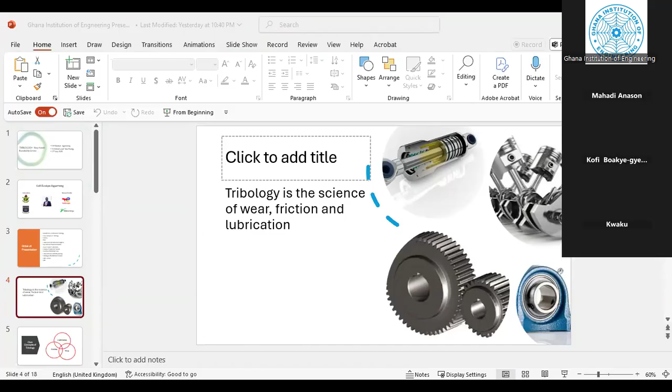Okay, so tribology is the science of studying interacting surfaces, and as simple as it sounds, it focuses on wear, it touches on friction and lubrication. As we all know, the kinds of machines that we use in our plants and in our factories all run on heavy duty equipment, and these equipment may span from compressors, gears, transmissions, turbines. I can go on and on. And all these equipment, some way, somehow, work with the principle of motion. And wherever there is motion, you cannot discount the effect of wear.

You cannot discount the effect of friction, and you cannot discount also the effect of lubrication. So tribology cuts across all industries: mining, power, manufacturing, Agric, OEMs. I mean, it cuts across all industries where machines are used.

Like I said earlier on, tribology stands on 3 legs. So there's the friction part, there's the lubrication part, and there's the wear part. I'll start by talking about friction. So friction, as we all know, it's a force that impedes motion. And that force itself is not bad as people make it sound. Friction must be optimized in machine operations for us to get the desired results as far as motion is concerned. When we talk about friction, people think friction is undesirable, but it depends on how.

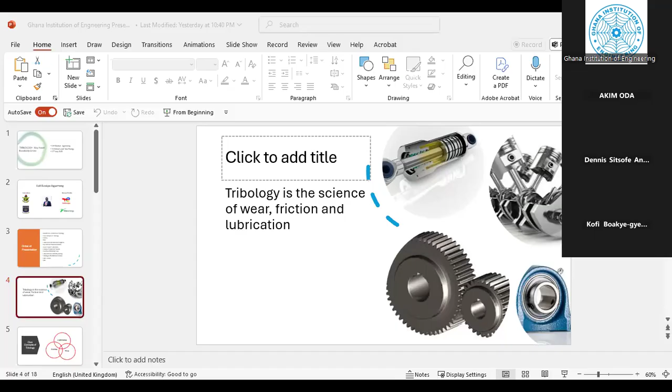Kofi, sorry, your screen is not rolling. I don't know whether you are rolling it at your end. I'm rolling it at my end. We are still seeing the first page. I don't know if it's the same to everybody. Hold on. Yeah, it's the same here. And then if you can even go to presentation mode, that will also help more. But if not, please let the screen roll. This is slide 4. Okay. Please guide me. I'm on lubrication regimes. I don't know if you can see it. Yeah, it's on now. Just popped up.

Okay, lubrication regimes. So when it comes to lubrication, there are three main lubrication regimes. We have the hydrodynamic lubrication, that is the expected state, the ideal state. And in this state, you have the two mating surfaces fully separated by a fluid film. That is the ideal and the desirable state. Then we have the boundary lubrication.

The boundary lubrication is the tricky part, where if you see the journal bearing, the shaft is about turning, and that's at the start of the machine. The load of the shaft, the weight of the shaft, is lying on the bearing. At this point, there is contact between the shaft and the bearing, and that is at the start of the machine. At this point, we call it boundary lubrication. So there is contact, and there is no lubrication film separating the shaft from the bearing. This is a very critical point, or the first stage in any lubrication process. This is what we call the boundary lubrication.

At this point, you need a wedge or a fluid film to separate the load from the bearing. And because this is at the start of the running of the machine, we have special additives we call EP, extreme pressure additives. These extreme pressure additives in the lubricant form coatings around the load. And when it forms that coating, if there is wear, the wear happens on the surface of the coating. This is a special additive we add to the lubricant to play that role at the boundary lubrication level. And this is applicable to gears, it is applicable to bearings.

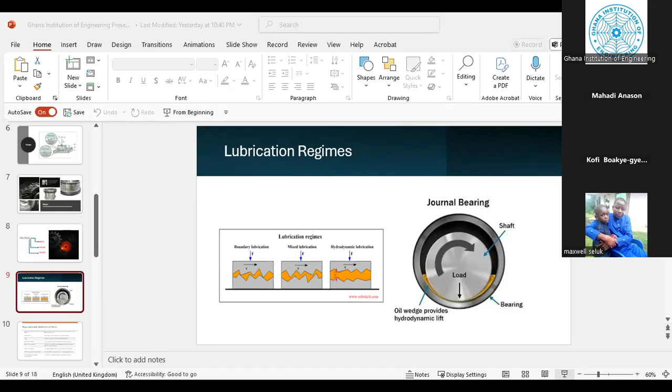Please, your screen. You are still on slide 9. I'm still on the key lubricant selection criteria. That's right, 10. If you can push it down one from your end. Okay, push it down one. Key lubricant selection criteria. Please, are you there? No, we are not there yet. Hold on. We're still on lubrication regimes. You are still on lubrication regimes, on your screen, the diagrams. Let me stop sharing. They should change it on the screen that you are projecting, please. Okay. I just want to stop sharing and then share again. Yeah. Just a minute.

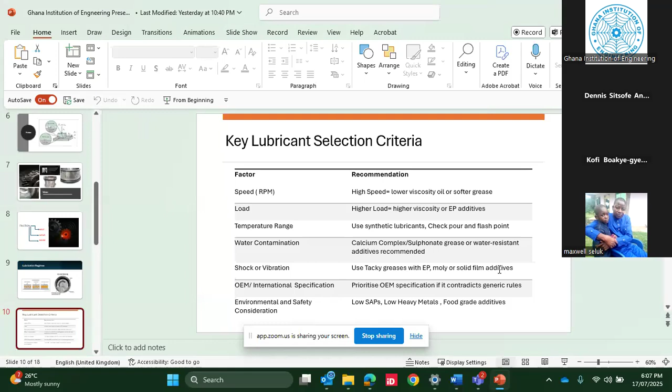If they can see the screen. Please, can you see my screen? Yeah. Yes.

Key lubricant selection criteria. Correct. So I've touched on speed. I've touched on load. I've touched on temperature range. I touched on water contamination, shock or vibration. Then also you look at the specification of the equipment. So the specification can come in so many forms. Different OEMs have different specifications. We have specifications also advised by the lubricant supplier.

So a typical example, let me use a vehicle. Let's say you drive a vehicle and you have a requirement for a 0W20 specification. One needs to understand what the 0W20 means. This 0W20 is a viscosity grading. When it comes to specification, you can have the viscosity grading as a specification, and you can also have the performance specification. So your vehicle has 0W20 in the manual as a specification.

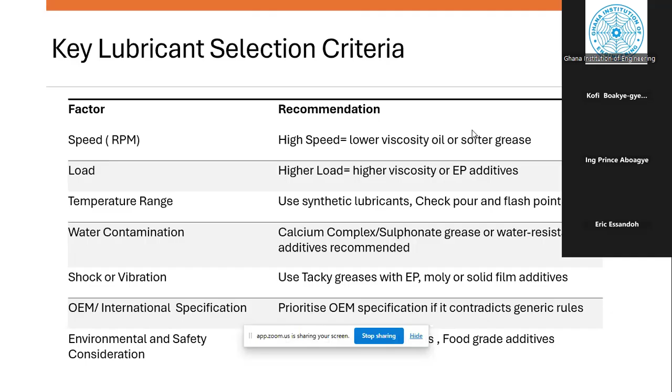For food grades, a food or a beverage plant where there is that possibility of the oil or the grease getting in contact with the food, there you go with the food grade. We have lubricants that work fine, but you can even eat them. They are not poisonous, they are not toxic. They have been specially formulated so that when they come into contact with the food or the processing material, it doesn't become poisonous or hazardous to the end user. So these are some of the key factors you need to look at when selecting a lubricant for a particular application.

The impact of poor lubrication. I can't overemphasize this point. Equipment life reduction. If you don't lubricate well, you reduce the life of the equipment. And reducing the life of your equipment means increasing your operating cost. Downtime is also an issue that is tied to incessant, unplanned maintenance schedules. Production downtime, you lose revenue.

Then if you are not lubricating well, remember I told you that friction generates heat. So if you are not lubricating well, you are in the factory, just like you mentioned, the temperature level, your thermography will hit the roof, and it will create all kinds of hazardous conditions for the operators and the workers around that area.

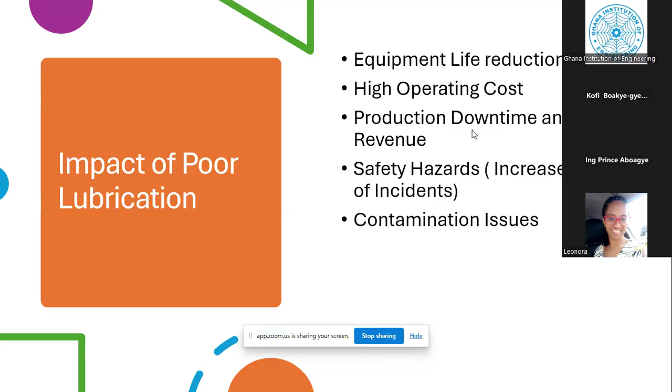Research has shown that lubrication-related failures usually come from these factors. The wrong lubricant. And when I talk about the wrong lubricant, what do I mean? Wrong specification. And the wrong specification can be as a result of wrong viscosity, wrong performance specification. A typical example is you go to a process plant, because of inventory issues, space issues, cross-contamination issues, we decide to rationalize. So we are rationalizing, let's say, an EP2 grease for all or most grease applications on site. So there you can have some wrong lubricant for some critical applications.

There are some applications that require a certain consistency as far as greasing is concerned. And when it comes to greasing, greases come in different consistency levels. When I'm talking about consistency, I'm talking about the thickness of the grease. So we have the 000 up to the 6. So 000, we have 00, we have 0, we have 1, 2, 3, 4, 5, 6. The most common ones we know are the 2 and the 3. The 2 is the multi-purpose grease that we are used to, that level of thickness.

As we go up 3, 4, 5 and up, the grease becomes harder. It becomes more consistent. It becomes thicker. When we go below 2, the grease becomes soft. When we hit 000, the grease becomes fluid. So if for some reason you decide to rationalize because of convenience, because of cost, because of price, because of inventory constraints, then you can run into that space of using a wrong lubricant.

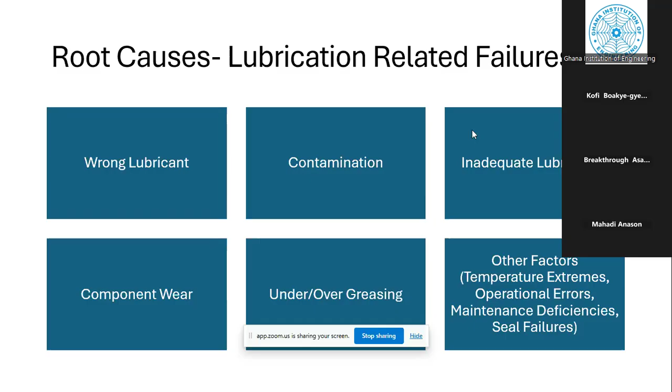We have to integrate predictive maintenance or oil analysis into our preventive maintenance schedules. And sometimes, because of cost, we decide not to do any of that. We would prefer to go with reactive, depending sometimes on the financial muscle of the plant or the resources allocated to the asset manager. So these are some of the factors that lead to equipment failure, and I'm talking about the ones related to lubrication.

For us to minimize or eliminate this, of course it's not possible to eliminate it entirely, but to reduce it, we need to adopt some of these predictive analysis techniques. Oil analysis is one. It gives you that predictive eye. You are able to predict what can happen in terms of failure. It also gives you an opportunity to see the condition of your equipment and also the oil. Debris analysis, we do that. We use infrared to do thermography.

Temperature is a function of friction. So thermography analysis can give you a fair idea of what is happening. Vibration, ultrasound testing, visual inspection. With visual inspection, you can use probes to go into the equipment to check how it is faring. So predictive analysis techniques are also critical. I have always advocated for the hybrid maintenance style, where you do the preventive and the predictive also.

The downside of preventive is that sometimes you overuse resources, because you have to change the engine oil at 250 hours. You are forced to change it. But good oil analysis or condition monitoring can push the oil from 250 hours to maybe 300, and that extra 50 hours will save you money. That extra 50 hours, if converted from downtime, can increase your revenue, and that will also affect your bottom line. So when you integrate the predictive into the preventive, it helps. If you are doing preventive alone, sometimes you realize that resources are not wisely used.

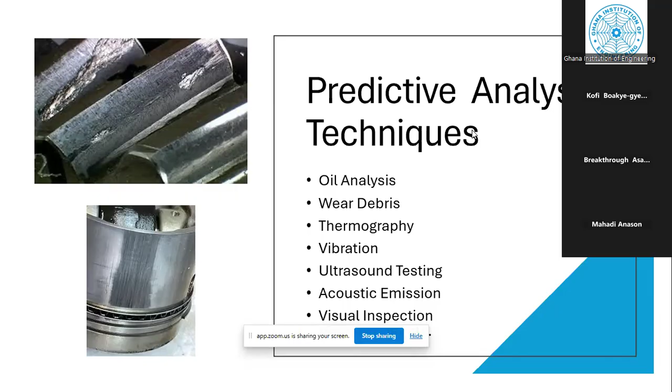Lubrication as a reliability strategy.

We can deploy lubrication as a reliability strategy when we follow best practices. And when we talk about best practices, I will touch on right lubricant. And I've spoken about specification, with regards to viscosity, with regards to performance. The right amount of grease. The right amount of lubricant is important, especially in cases where we are doing manual greasing.

Sometimes a technician gets to the area of application. If it's a plummer block, he gets there, he gives like 7 or 8 shots. A very masculine person's 7 shots is not the same as a very skinny person's 7 shots. So the right amount is also important. If you go below the expected amount, you expose the equipment to wear. That is in the case of manual lubrication. If you go above the expected, like I said earlier on, you would expose the equipment to a lot of thermal stress, and this stress will end up deteriorating the additive pack in the lubricant. So the right amount is important.

Now we have devices like the Shell Tactic EMV, a single point self-lubricating device that is programmed to deliver a set amount over a set period of time. So in terms of lubrication, if you plot the graph of time versus amount, you have a very good, perfect shape. So the right amount is critical.

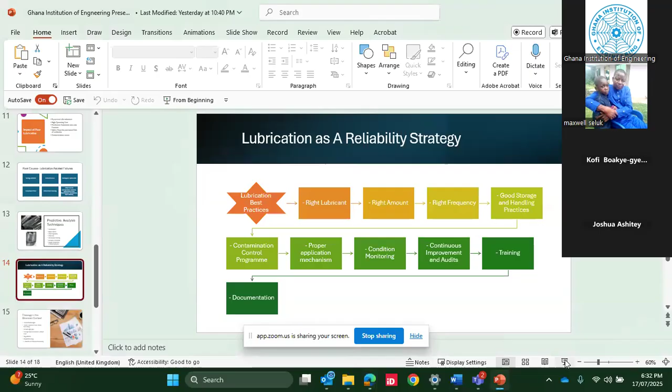Yeah, hello. Yeah, hello, we can hear you. Okay, so I think I had issues with my network, so I'm back. Yeah, so Kofi, like I indicated to you, we are somehow behind time, so let's speed up. Okay, yeah, so I'm almost done. I think I have about 3 more slides to go. Sure, thank you.

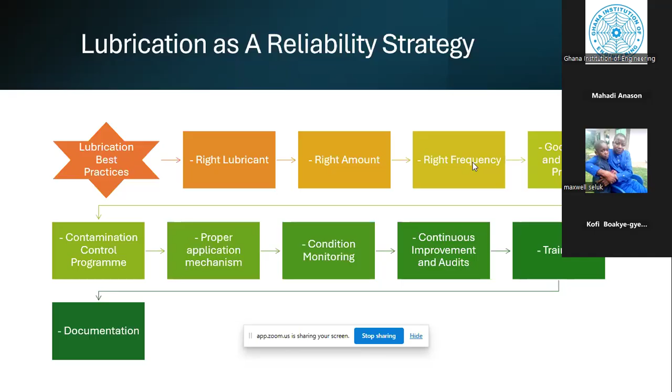So using lubrication as a reliability strategy, you need to look at these best practices. I touched on contamination control, proper application mechanism. So the proper application mechanism, like I said earlier on, the manual greasing. Somebody's giving 4 shots, somebody's giving the same 4 shots, but in terms of the muscle impact, they are different. Condition monitoring is critical. You can't be doing preventive maintenance without putting in a bit of condition monitoring.

It's also critical. Then there must be a continuous improvement program where the business or the asset team are deliberate in trying to improve their systems, their lubrication system, their storage, their handling, their specifications, documentation, audit. Very, very important. Then training, very, very important. I've done a lot of trainings. I think on the average every year I do about 45 trainings. The knowledge gap is huge.

We need to bring in experts to touch on storage and handling, specification, even for open gear or mill lubrication optimization. There are models where you can always bring in experts to push the knowledge level to the expected. Then documentation. We need to document our lubrication maps, our lubrication charts, so that it becomes easy for us to do troubleshooting when there is a problem.

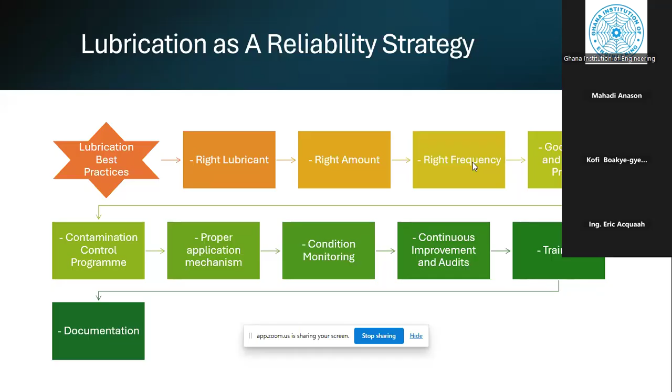The regulation: unfortunately, our regulatory body only focuses on fuel, but lubrication is one area that we need to look at in terms of monitoring. What are the popular brands? What are they selling? If it's brake fluids, do they meet specification? Brake fluids border on safety. Are we sampling? Are we testing? Are we using the right glycol? Are we using the right additives for our braking systems? Regulators must up their game in this regard.

Then foreign specification versus cost. Because we are not manufacturing vehicles, because we are not manufacturing equipment, most of the specifications we see here are European tailored. So somebody develops an equipment, develops an engine, then on it he puts in a specification that speaks to the European temperature environment. And because they do winter, summer, autumn, they go for the very extreme synthetics. The extreme synthetics mean the oil must survive in a very cold climate and in average or manageable temperatures. Because you are pushing the oil to those two extremes, the additivization is top notch, and that costs a lot of money.